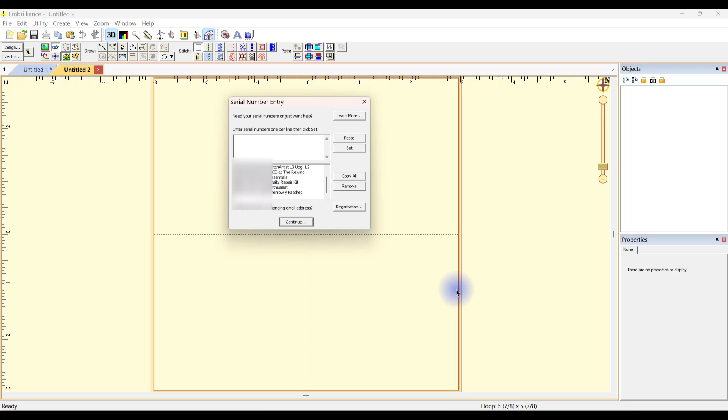Okay, as you can see, I clicked on serial numbers and I'm able to scroll down here. These are the components I have. I entered the serial numbers up here and I said set, and then it put them down here into my Embrilliance. So you can see I have Stitch Artist Level 1, Level 2 Upgrade, Level 3, the Rewind, Essentials. I have it all, and I love it. But anyway, that's how you can tell what you have.

Okay, the next question Buff Chick had was, how do I find the knockdown stitches? I think I have them with Enthusiast, and you're absolutely right, you do have them with Enthusiast. So this is just a quick stitch I made for a friend of mine. This was to go inside of a maple leaf that she had, and I drew this out for her. And it would stitch out like this.

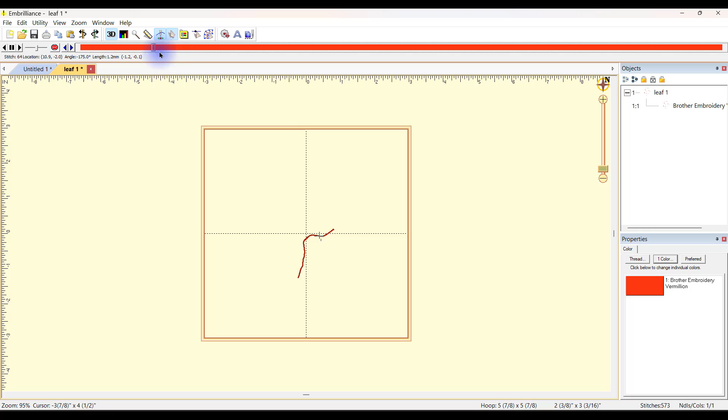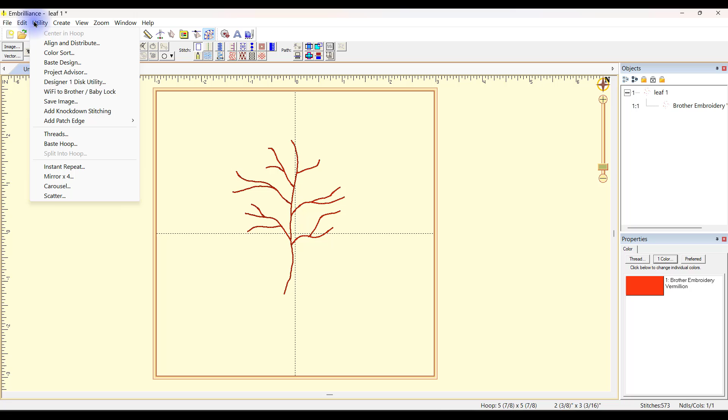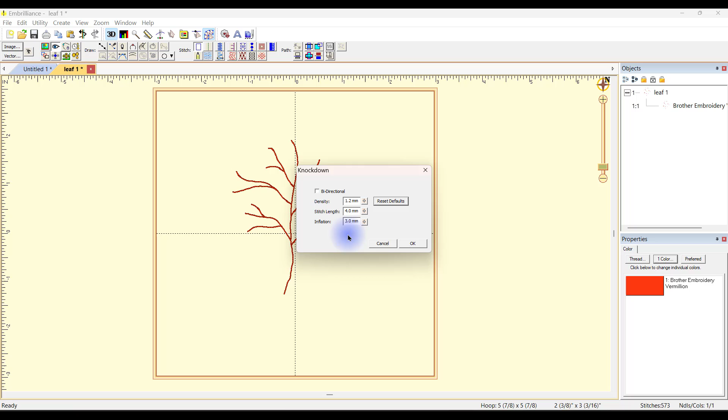Okay, and the way that you would put the knockdown stitches around this, let's make it a little bit larger, there we go, is just to come up here to Utility and add knockdown stitching. And you can change these parameters. You can restore it to the default, which is what it is at right now. You'd play with those and do a test stitch, and then you'd know what you liked or not.

So if I just say OK, you can see that it added the knockdown stitching all around that leaf. So let's just say that we don't want the leaf. This is something from another project I did for my granddaughter Layla, and let's pretend I'm going to put this on a towel, and I don't want the towel to be coming up around the words or the little unicorn. So I could put a knockdown stitch around this: I come up here again to Utility, add knockdown stitching, leave this how it is if I'd like, and say OK.

And there it is. That would knock down all of the fabric or the nap of the towel so that my design would shine through beautifully. And of course you can make the knockdown stitching whatever color you'd like.

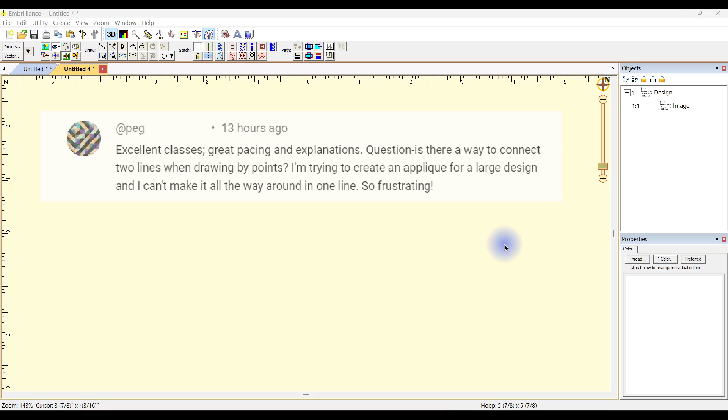Okay. Now for Peg's question, she had asked, is there a way to connect two lines when drawing by points? Yep, I'm going to show you that right now. So let's get rid of this. And of course you have to have Stitch Artist to be able to do drawing with points. So I come up here and it says draw with points, and I'm going to start drawing something. And I'm going to right click right there to stop.

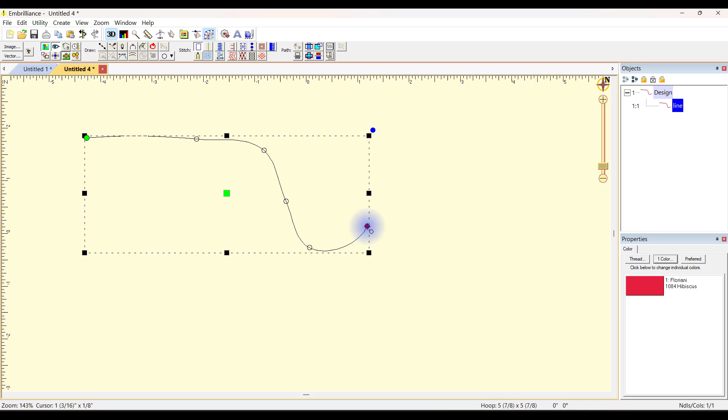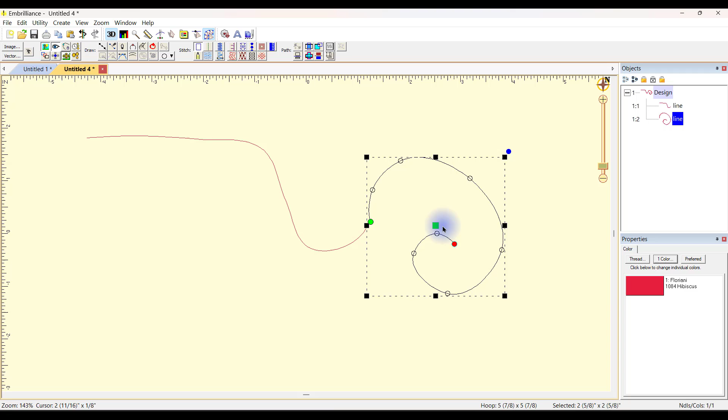And then I realize, oh my goodness, I didn't finish what I needed to finish. I'm going to start drawing with points again right near there. And I'll right click to end it. And notice if you look over here, we have two separate lines. I can move line number 2 closer to the first line, but if you look very closely, you'll see that they still aren't perfectly touching. See that? Now watch what happens.

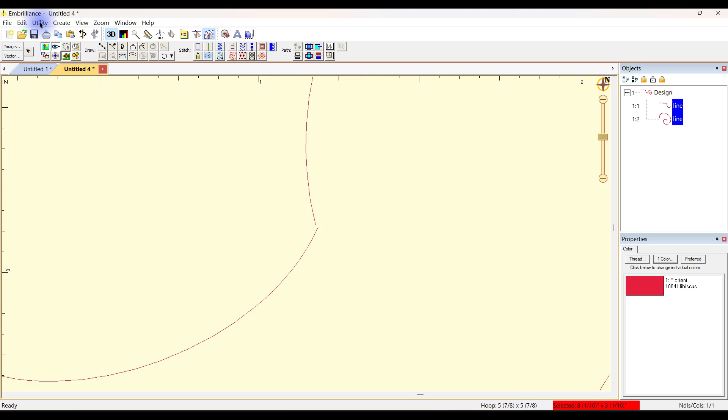When I grab both of these over here in the Objects panel, I can come up here to Create, Outline, and Connect Outlines. So watch what happens in that little space where they're not connected. Did you see that? It connected them just like that.

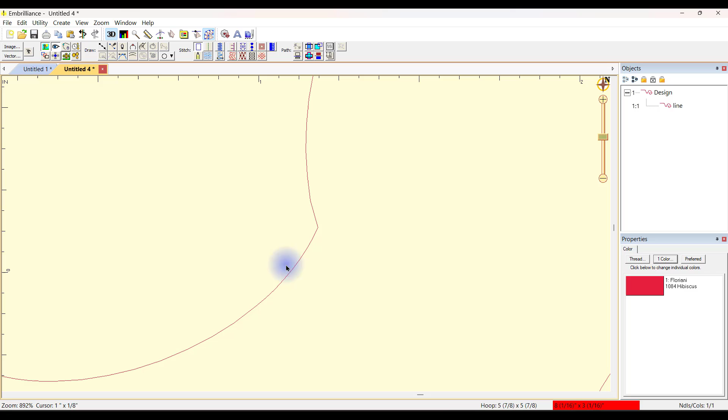So I have one here that I was messing with. Let's get rid of this piece, I don't need that. I was trying to do this umbrella, and here's what I have over here. If you'll notice this one, look on the Objects panel - that is one design. It started out with these two designs right here.

Now let me show you what I'm talking about. I'm going to come up here with points again, and start right here and click, click, click. I'm going to hold down my control to make that a sharp corner, then start clicking again all the way around till I get down here. Then I'll hold down control and make a little sharp corner, then come right here and sharp again there, come up to the top, come down here and go right to this one - click, oopsie, click, let me go here, click here. This part you don't pay attention to, so just click there to end it.

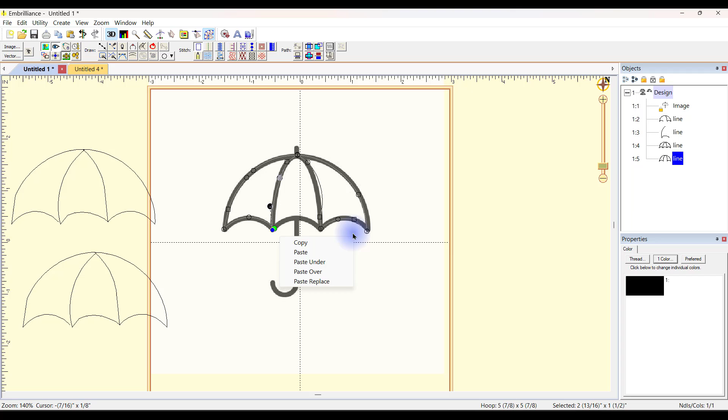All right, let's just look and see. If I hide the image and come up here to hide the image, what do we have? Okay, not very well traced or point by point drawing, but I'm just doing this very quickly.

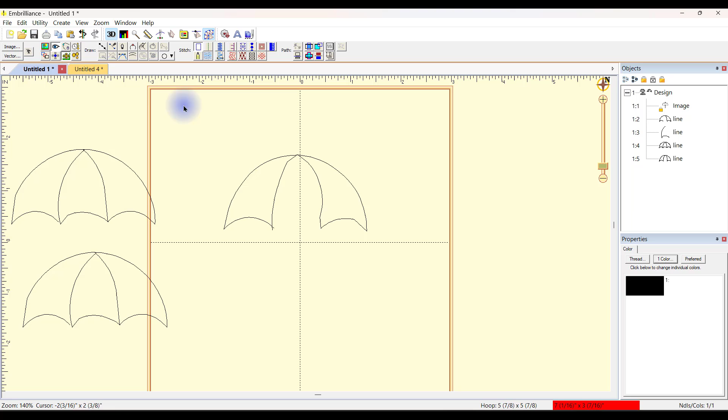And what I want to show you right now is, look at this space right here. I have forgotten that part of the umbrella. So let's put the umbrella picture back on there. We know I ended right here, so I'm going to start there again - go click, click, click, right click to end it.

And now, well, let me get rid of this one that was correct here. And if you look over here, I'll get rid of this one and this one. Okay, so now let's hide the design again, the umbrella picture. Okay, perfect - that looks really good, right?

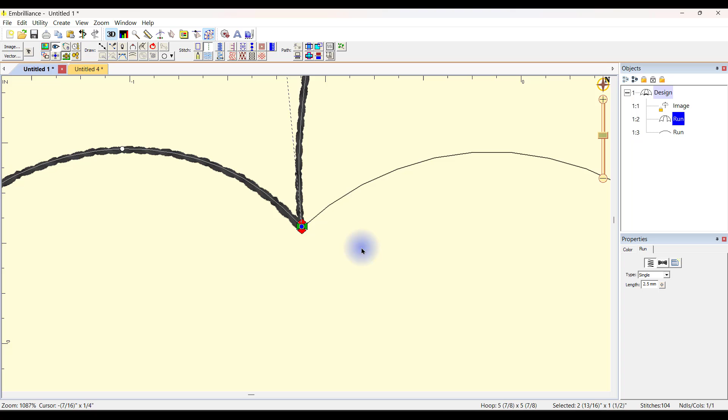But as was said, it's actually two lines. Of course I can make them both run stitches and it looks okay, but it's going to stop before it does this. If I want to make this all one piece, as she had said, I could scroll in and make this look a little bit better - put this here and put that there so they're really on top of each other and meet more carefully. And over here looks pretty bad for this piece, so I can make it end on that one so it looks a little bit nicer.

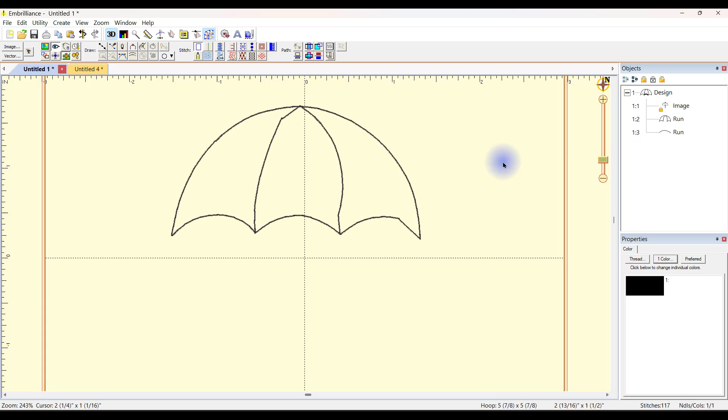And let's scroll back out. Okay, so that's a little bit better. Still cuckoo there, but like I said, I'm just doing this fast. But again, what she says she has is two separate things, and she wants them to just be one.

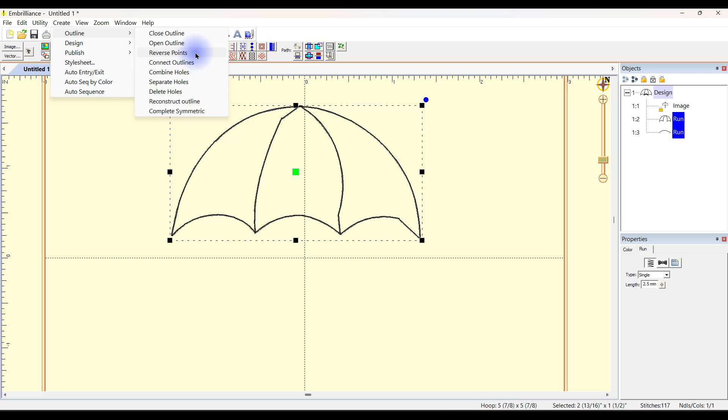So all you have to do is grab this one, hold down your control key, grab that one, have them both grabbed. Come up here to Create, Outline, Connect the Outlines. When I click on this, watch what happens over here in the Objects panel. So again, Create, Outline, Connect Outlines - watch it, look at that. It is just one piece. And there it is, just like that.

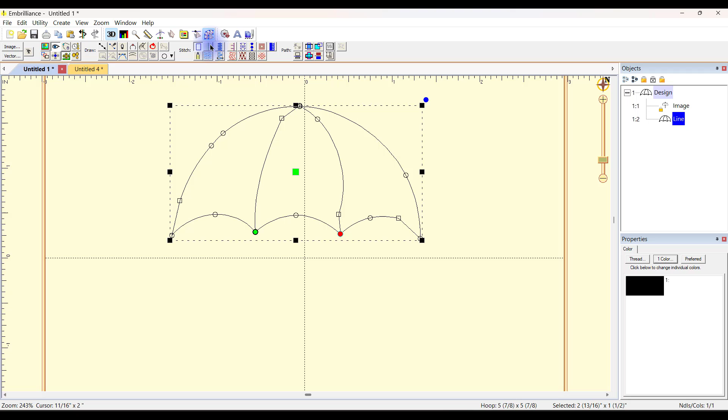So now we just have one piece and it's going to work perfectly. Right now it's a line - I can make it back to a run, or I could make it a zigzag, I could change the width of that if I don't want it so wide. There's so many things I could do with this now, but that's how you can combine lines.

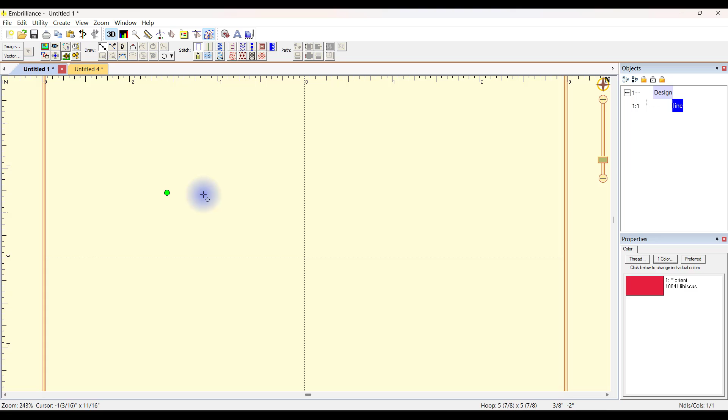So let me show you that again. We have one line and we're going to point, point, point, point, point, point, point, and I'm going to right click to end it. And then I realize, oh my goodness, I need to connect this part. So I'm going to highlight that again so I know where I ended, and I'm going to start near there again, and a point, and a point, and end.

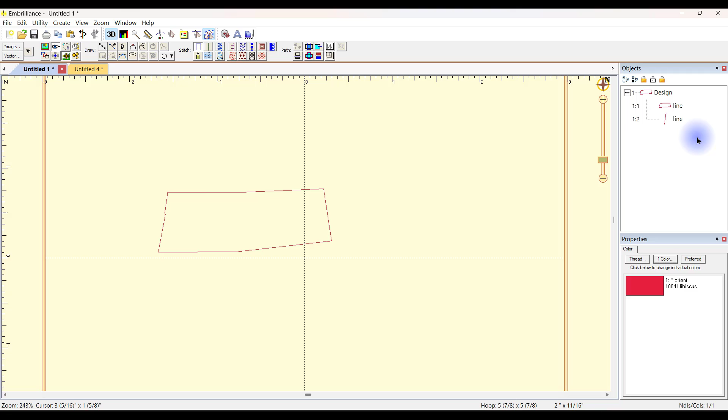But notice over here we have two separate lines, and actually you can see, if you scroll in, I wasn't very careful here - I have a little jog here, and I could fix that a little bit if I wanted to. But even if I fix that, they're not going to fit together perfectly because there's still two lines.

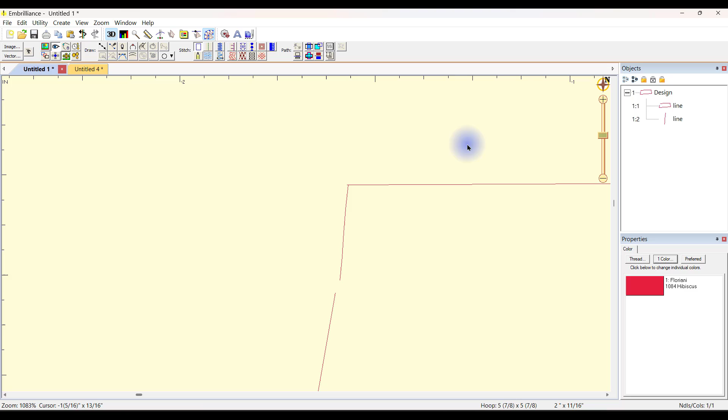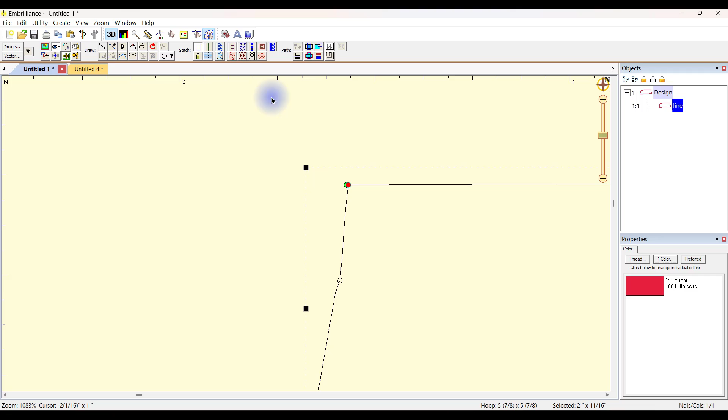And I can actually just move this over here and you'll see what it's going to do. Suppose I just do it like that. I can take both of these, come up here to Create Outline, Connect Outlines, watch what's going to happen both here and over here in the objects panel. Watch this and then look over there. So Create Outline, Connect Outlines - boop. Look what it did. It added a little piece in there for us so they were connected perfectly.

Okay, I hope that helps. Thanks for joining me. And if you have a question, put it in the mailbag in the questions down below in the comment section of the YouTube video, and I may pull yours out and do a video for you. So thanks for joining me.